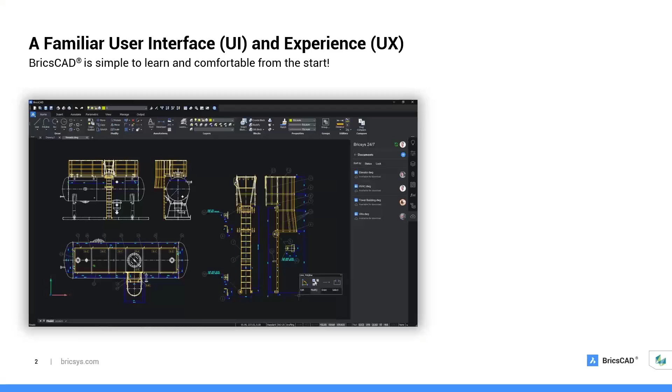Now, a few things about BricsCAD that you may not know, because maybe you've never worked with BricsCAD before, maybe you've never seen it before. The first thing is BricsCAD is fully DWG compatible. You do not have to translate your DWGs, you do not have to save as your DWG. You simply open and save and work with DWGs in BricsCAD, just like you have with your existing application.

Our command structure is 100% compatible. So if you want to draw a line, you say line. If you want to draw a circle, you say circle. Move, copy, all the functions that you're used to are the same in BricsCAD, so it's very easy to start working. Our support files are highly compatible — for example, we load in and run your Lisp routines just as you have in the past. We try to make this as easy for you as humanly possible.

In fact, my goal as the Director of Implementation is to make your BricsCAD look so familiar that we achieve what we like to call muscle memory compatibility. That means you simply sit down at BricsCAD and you just start using it the same way that you've used your familiar CAD application for years. That makes it super easy to learn.

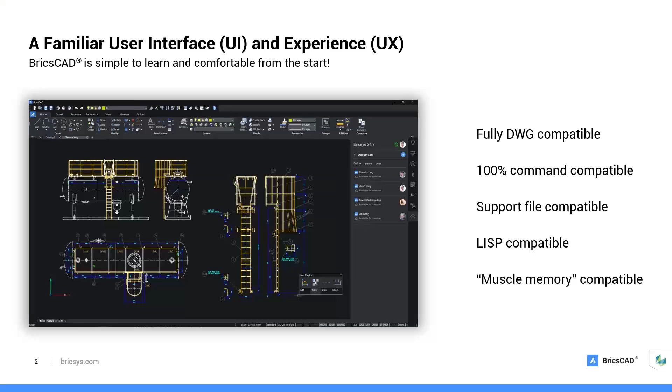Now, BricsCAD is not just a product, it's actually a family of products, and I'd like to take a moment to make you aware of how that works. The BricsCAD product family spans from our classic product, which is kind of like AutoCAD LT, with an important difference: it runs Lisp, which AutoCAD LT does not. This moves up through BricsCAD Pro and Platinum, which adds additional 3D functionalities, programming functionalities, mechanical modeling functionalities, and then all the way up into mechanical and BIM tools. All of this together is called BricsCAD Ultimate.

And of course, all these tools also come with our BricsCAD 24/7, which is our common cloud-based collaborative data environment tool to glue it all together. So when you try BricsCAD, and after this presentation today I hope you will, you'll be able to download BricsCAD Ultimate and see for yourself.

Now, why BricsCAD? This is a reasonable question — why would I ever want to change what I already have? Let's answer that briefly. Well, the first thing is BricsCAD is very affordable. From a licensing cost standpoint, we still give you perpetual licensing options, network licensing options. I'll talk more about that a bit later.

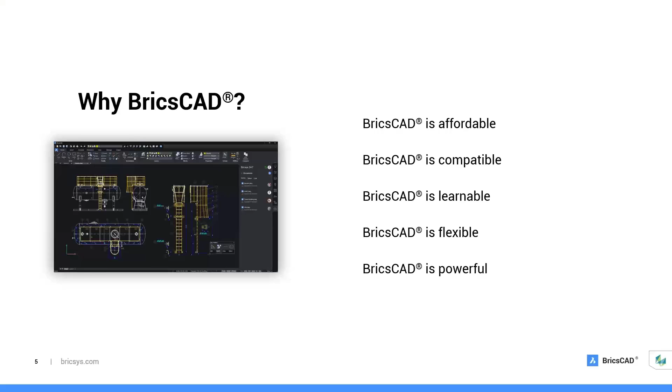Put that all together, and BricsCAD is an easy decision. You can save money, you can learn it quickly. It makes a lot of sense from all of those perspectives. But here's another thing: BricsCAD is highly powerful. We're not just doing the same things your existing application is doing. We're doing more, and I'd like to share some of that information with you now.

Not only are we highly compatible with the DWG standard, so you just open and save your DWGs like you always have, and our command compatibility, but we also read in your CUI, custom CUI elements like toolbars and drop-down menus and ribbon tabs. We can read in your macros and scripts directly from your CUI files. We support your plotting configurations, pattern files, line types you may have customized, templates. We open your sheet sets. All this stuff we do in the same way you're already used to.

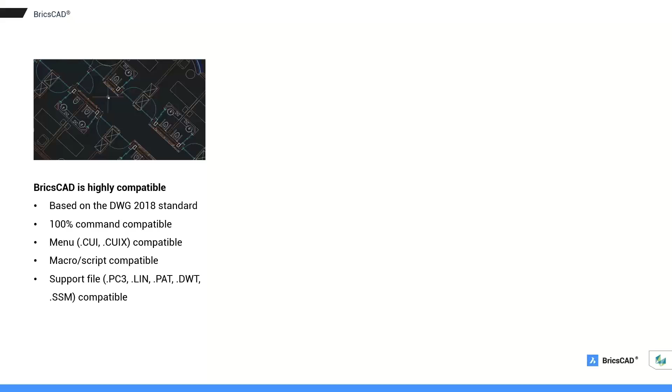But if you add to that the fact that BricsCAD supports multi-threaded functionality, we do a lot of things behind the scenes to open files much faster. For example, our sheet sets use multiple cores to open those drawings very rapidly. We're doing a lot of things in the background from a memory processing point of view and data integrity point of view that's actually superior to the solution you're probably already using.

One of the core things we really try to do is use machine learning and artificial intelligence algorithms to do things that make what would ordinarily be very time-consuming, very repetitive tasks, like organizing blocks or copying repetitive geometry all over your drawing, give you new functionalities like Blockify or CopyGuided that allow you to speed those workflows. So we're not just an AutoCAD compatible tool, we're an AutoCAD compatible tool that's going the distance. We're making this a better product, more powerful, faster, and more based on time accelerating AI workflows that help you get your job done faster.

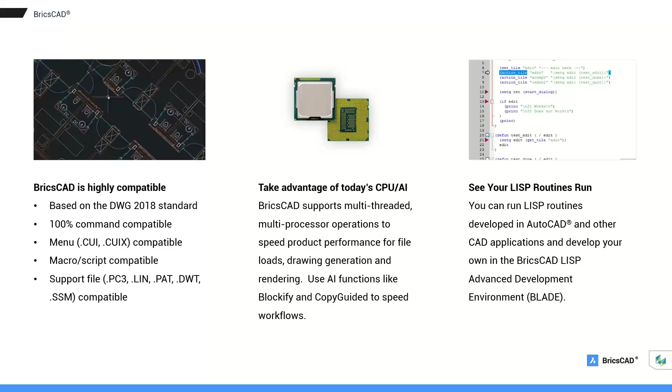We run your Lisp routines. We run them as well as AutoCAD, and we run them faster because of our Lisp Advanced Development Environment. We can actually load in and run your tools much more rapidly than you've been used to in the past. These are just a few of the things that we can actually do better.

But now let's get to the meat of the discussion. The question might be: okay, I'm interested, but how can BricsCAD actually replace my existing solution? Show me some specifics. So let's talk about that.

Well, the first thing that I like to do from a standpoint of helping companies make the migration is I'm always trying to think about what are the best approaches and the best practices. What do I need to understand? How do I approach this? What order do I perform the tasks in?

If I make this migration process as easy as possible, several things happen. I make fewer mistakes. I get from my existing CAD solution to BricsCAD faster, and not only with fewer mistakes, but faster. And this allows me to achieve a quick success, and it allows me to show my users how easy it can be to replace their existing solution.

So here's the order in which I do that. I use this strategy: I familiarize the users with what BricsCAD looks like. I then decide what kind of licensing scheme I'm going to use for my company. I'm going to migrate my customized assets like CUIs and Lisp files so that I can make BricsCAD feel like your existing solution. That will make it very easy for my users to learn. If I perform the migration in this order, it works very nicely. And I'll share a customer success story with you here in just a moment.

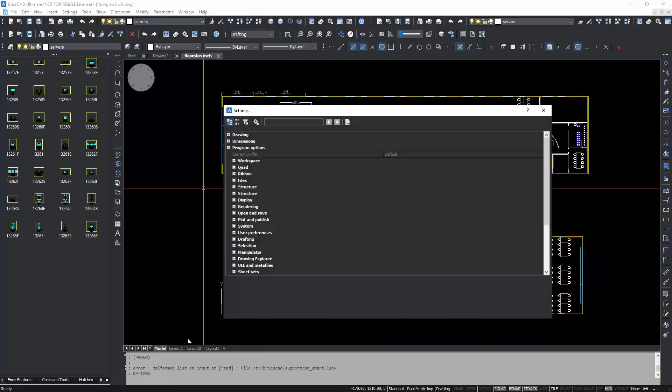Now, if I use the options command in BricsCAD, it will bring up our settings dialog box. This does look a little bit different, but what we do here is we just take advantage of our search bar. So I can say something like support path, and I can start searching through anything that has support paths that I may need, like here. So in our system directory, we see the program folder paths, and we can customize those.

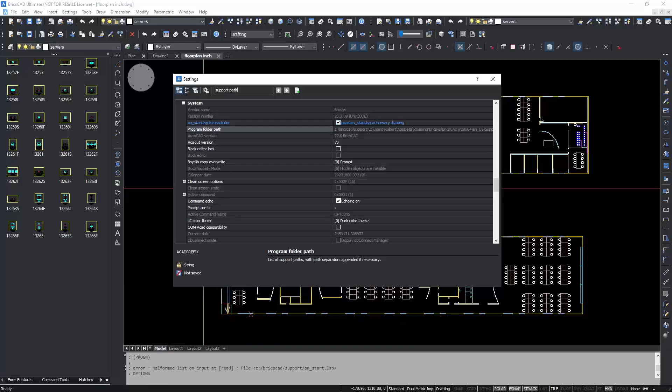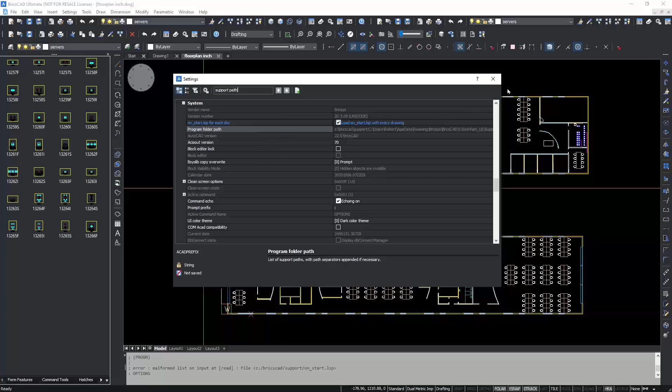So we can set things like our BricsCAD support directory, which I've taken the liberty of setting up over here. I've just copied over the things that I'm going to need in my BricsCAD that I had in my AutoCAD - some palette folders, my plotter configurations, support directories with things like Lisp and PGP files. So you just copy the assets over, and then you use the settings dialog in BricsCAD to set the folders that are needed. It's very straightforward. If you've used AutoCAD before, or if you've ever used the AutoCAD options box, you'll find it very comfortable to use this right away.

So let's move forward here. Now, if we set those support folders, we can now start copying the Lisp routines and CUI elements that we're going to need into those support folders, and we'll be able to start setting things up. Now, one of the first things that people usually want to use is they want to know whether their Lisp files are going to work. And yes, in fact, they will.

And I can show you right here in BricsCAD. We will use the familiar appload command - you've probably used this in your AutoCAD solution. Bring that onto the screen here. And here you can simply navigate into the BricsCAD support folder that I created, and you can load in your tools here. If you click the auto load column, like I'm doing here, this is analogous to the startup suite that you would use in AutoCAD, and that will make these programs automatically load every time that BricsCAD starts.

Now, you can either use that methodology, or I'll switch back to PowerPoint here.

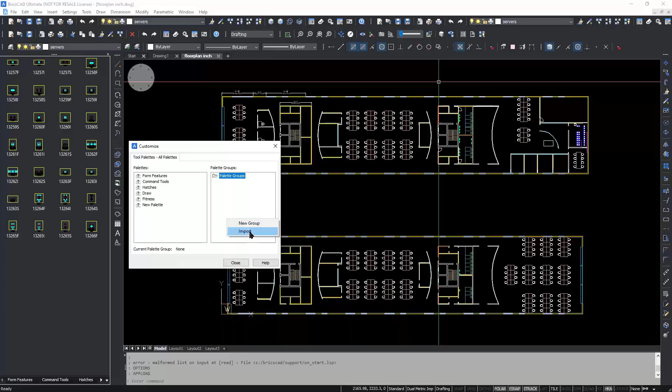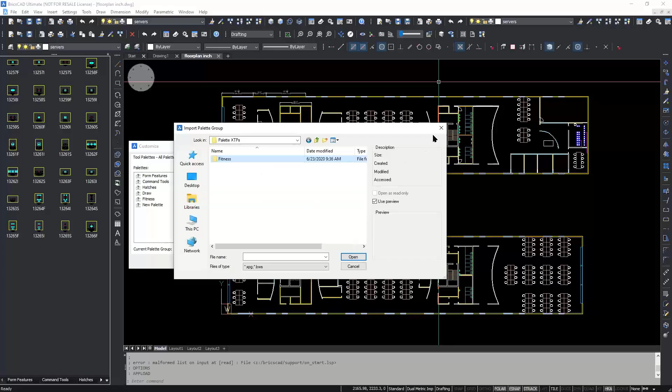So here we have a palette interface, and we'll just right click in there. All I have to do is go to Customize Palettes, and it's very easy to just import. This will allow me to bring in - I'll go over to my Z folder, and I have some palettes that have been formed here. You'll see that the XTP files and the images for those palettes are stored, and here I can simply import them. I've already imported this one.

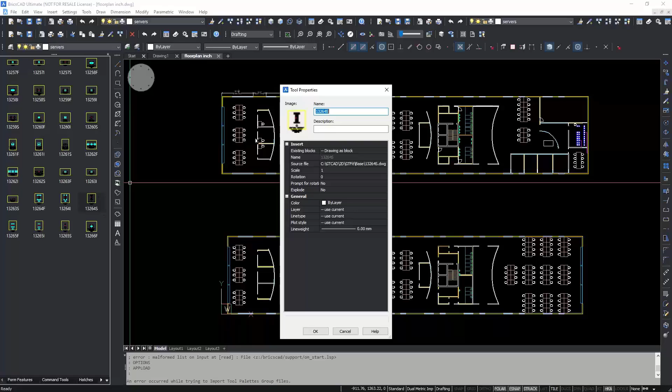Then you'll see the properties behind each one of these elements. It brings over everything you would expect: it points to the target file location, scaling, auto rotation, auto explosion, line type, and layer assignments. So everything you're used to will come over, and it will work just exactly as you would expect it to work. It's very straightforward to do, a very simple process.

How about CUIs? Our CUI editor looks a little bit different, but the methodology is the same. What I do is go into AutoCAD and export a CUI file that only contains the custom elements I want - only my toolbars, only my ribbon tabs. I'll then go into BricsCAD and read that in as a partial BricsCAD CUI. I'll show you this.

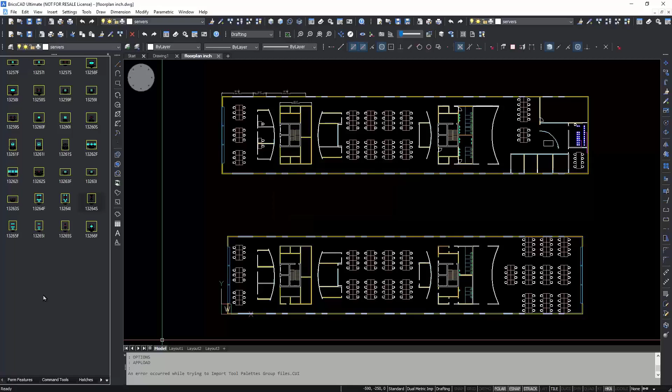So the CUI command is exactly the same as you're used to. Let's see, here we go.

It's stuck over on my other screen, so I may have to just skip that. Sorry about that. So yeah, let me come back.

When I go into the CUI command in BricsCAD, I simply use this file dialog and load the CUI into BricsCAD as a partial. That will add it into my toolbars, ribbon tabs, or workspaces. Whatever comes over from AutoCAD will be put into your default CUI. I apologize for the problems there.

All we do is grab the PC3 files, which are my printer configuration files. I take those from my AutoCAD folder and simply copy them into my BricsCAD folder, and that's it. There's nothing proprietary there, by the way. The PC3 file is simply a configuration that points to a printer driver on your system, so you can freely copy those PC3 and PMP files over into BricsCAD.